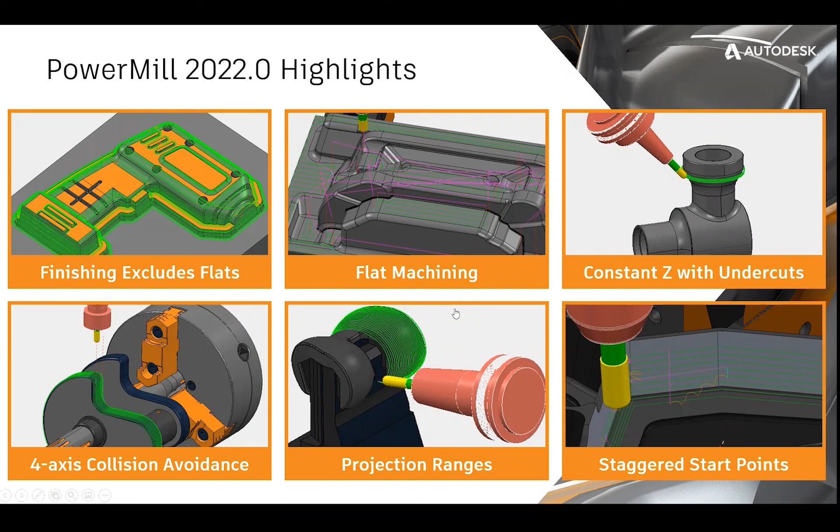And lastly, we're going to talk about staggered start points. This is one of my favorites. For those who weren't aware, you can actually do this manually, but now you have an option to do this automatically within the software. We're going to go into a deep dive here and talk about each one, then go into the software and show you exactly how to activate these features.

Okay, starting off with exclude flats. How does it work, what does it do? One of the biggest things when it comes to finishing toolpaths - if you're using some sort of steep and shallow, maybe a raster, or a 3D offset style finishing toolpath, the software is going to try to apply the toolpath wherever it can, granted that you don't have a boundary containing that toolpath.

So up to this point, if you take a look at the model and wanted to apply some sort of toolpath to it - in this case a steep and shallow toolpath - you would have to create a boundary in order to contain it to only focus on the actual core part, in this case the mold. So it takes a bit of a workaround, a bit of extra time, extra picks and clicks to get that boundary to work, and then you would apply the toolpath to the model itself.

Now inside of those three different types of finishing strategies, you have the option to exclude flats. Exclude flats excludes all of the flat machining areas, as you can see here. So fewer boundaries that you have to click or create, making for more efficient programming, and you can get your part out to your machine much faster. It's only going to be for these three toolpaths - I want to make sure we're clear on that.

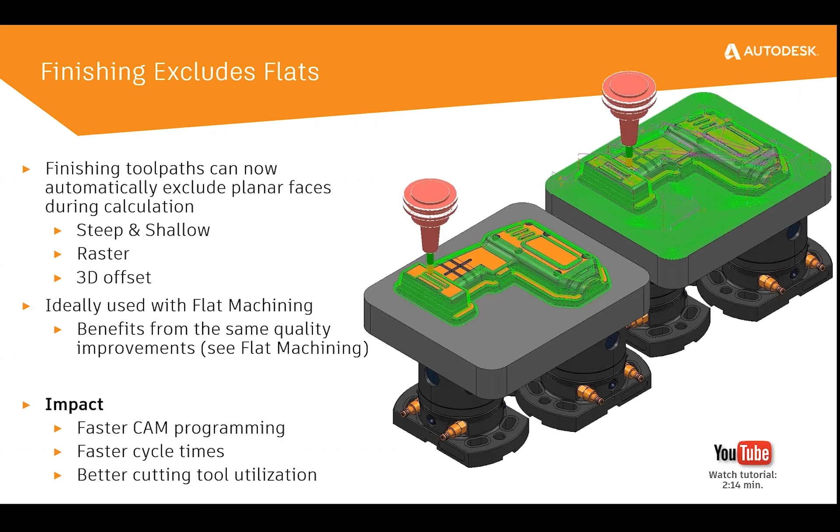Now, on the flip side of things, we also have an enhancement to the flat machining strategy. We're still sticking with the same theme of flat machining, or working with flats. One of the reasons for that is this is actually something Autodesk wanted to focus on a little bit more inside of this new release.

Again, just based on the feedback that they got from customers, and based on some of the forums that Autodesk has out there for PowerMill. So the flat machining toolpath has been around for many releases. I don't want you to think this is something new.

The latest update sees a considerable improvement in the quality of the boundary. If you don't know, there's actually a boundary that drives this toolpath. It has to understand where the flats are, and create a boundary on the back end of the software.

Up to this point, the boundary it was creating was causing issues with the way the toolpath was generating. It's a little hard to see, so I'll show that better during the live demonstration. But we have two toolpaths here superimposed - the green one is from 2022, the white one is from 2021.

The issue that was happening, and this is something I got a lot of calls on from customers, is that if you zoom in really close, it's kind of hard to tell, but it actually chamfers the toolpath a little bit, especially in internal corners.

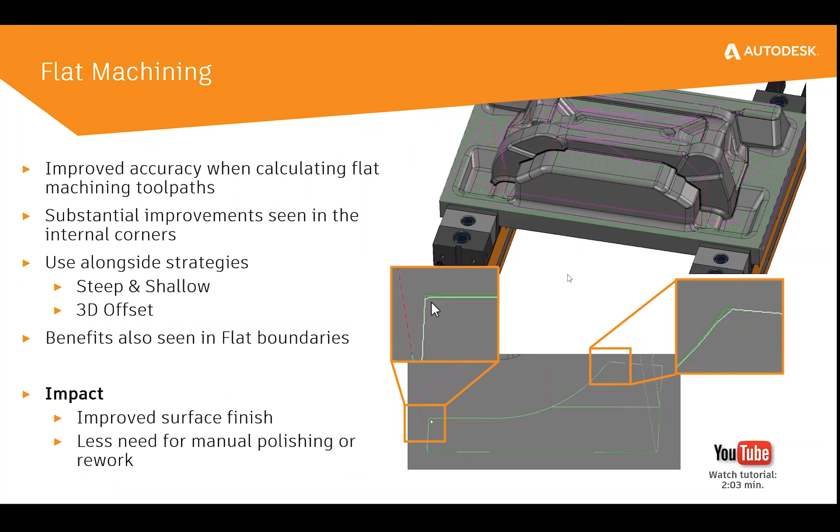All right, moving on to the next improvement - this involves the constant Z machine toolpath, specifically constant Z with undercuts. PowerMill has provided the ability to machine these undercuts with constant Z for a number of releases. This isn't anything new, but it really depends on the geometry being machined.

So if you were using, let's say, a lollipop cutter, you can actually focus this constant Z with undercut strategy with a 3-axis machine. You didn't need to use a 5-axis machine in order to machine some sort of geometry like this.

But if you wanted to, or if you had the capability to machine with a 5-axis machine, you can apply automatic collision avoidance. What does that do? It figures out where the collision is going to take place, and then it tilts the tool away from either the part model or the fixture, avoiding any sort of collision.

Now, in previous releases, the constant Z toolpath could fail depending on either the geometry, or if you combine both the constant Z and the undercut option. So it was failing - if you take a look here, it was causing some sort of fragmentation.

It wouldn't fail if you turned on the spiral option - you do have that option. And it would apply toolpath to the actual feature you wanted to machine, but this is what it would cause - a lot of fragmentation, a lot of noise around specific areas, and it just wouldn't give you a clean toolpath.

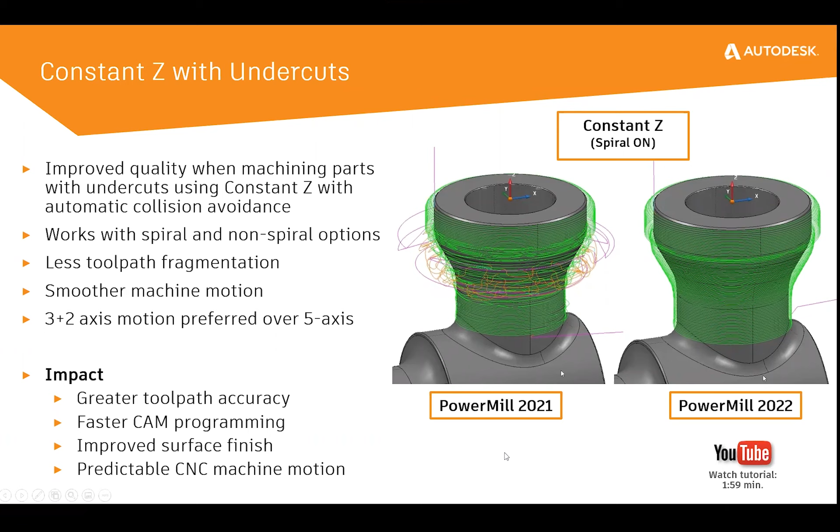All right, and then this is another one of my favorites - the 4-axis and rotary toolpaths. Up to this point, you didn't have the option for automatic collision avoidance. Automatic collision avoidance is an extremely useful feature that's embedded, but it was only capable, up to this point, for your 5-axis machines.

PowerMill now has the ability to actually apply this to your 4th-axis and rotary style toolpaths. It's doing the same exact thing - keeping the same exact tool, you can see that it collides here during this little feature. What takes place then is that it's going to cause the table to shift or move in a specific way in order to automatically avoid that specific area. So it becomes a true 4th-axis simultaneous toolpath because all axes are moving at the same time here. Really fascinating feature.

We're going to show this one in a live demonstration, so you guys will be able to see exactly what the machine motion looks like. But I'm really excited for this one because up to this point, you could only do that on 5-axis parts. Now you have the ability to lock the toolpath and apply that to your 4th-axis and rotary toolpaths.

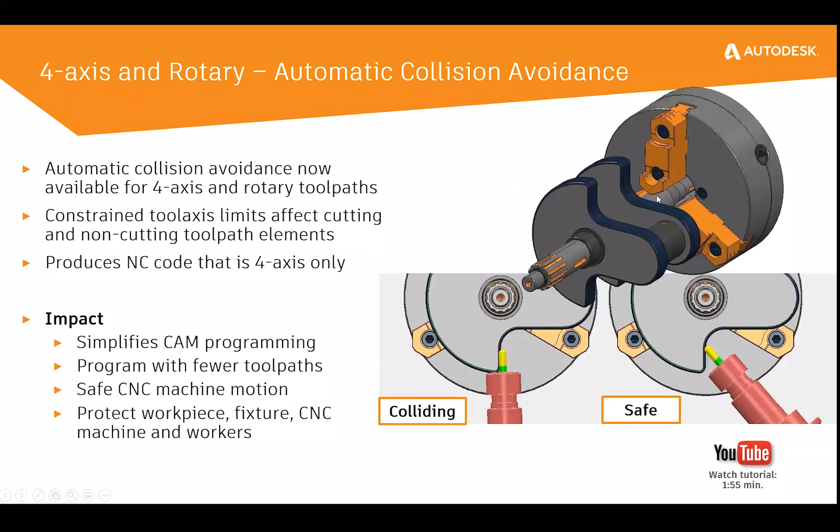So really specific toolpath. The way it works is that the user can create either some sort of reference surface, a curve out in space, or some sort of line out in space. And what you can do is translate that or project that geometry onto the model that you're trying to machine. So you can project a specific style of geometry - if you want the toolpath to follow that geometry, or follow a specific surface, you can do that and then project it onto the model you're going to machine.

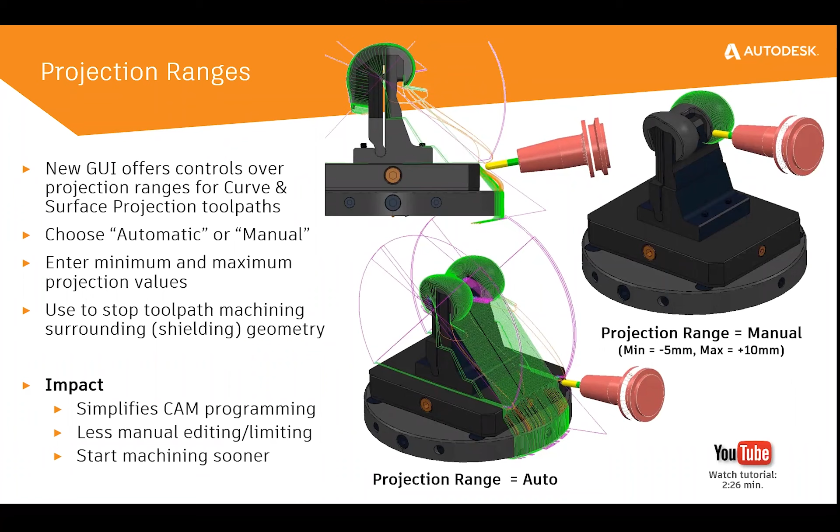Obviously, you can mitigate this by maybe having a bigger radius lead-in, or maybe having an arc in a specific way. There's ways around it. The point being is that no matter what, it's always going to be a vertical lead-in, right? So all the points are going to be vertical from one another in a closed loop.

So now with 2022, you have the option to automatically stagger these start points, right? So again, it's always going to have a forward motion for the machine, so it's not going to cause as much of a witness mark, right, as it would if you would have had just vertical start points.

Now, like I mentioned in the very beginning, you can do this manually, right? Especially if you guys are a little bit more on the advanced side of things, and have explored some additional functionality within PowerMill, you can actually change the lead-ins for these points. And I'll go ahead and cover that during the live demonstration as well, if you do need to do that manually. But again, point being, for this specific release, you can now do this automatically, right, for these toolpaths.

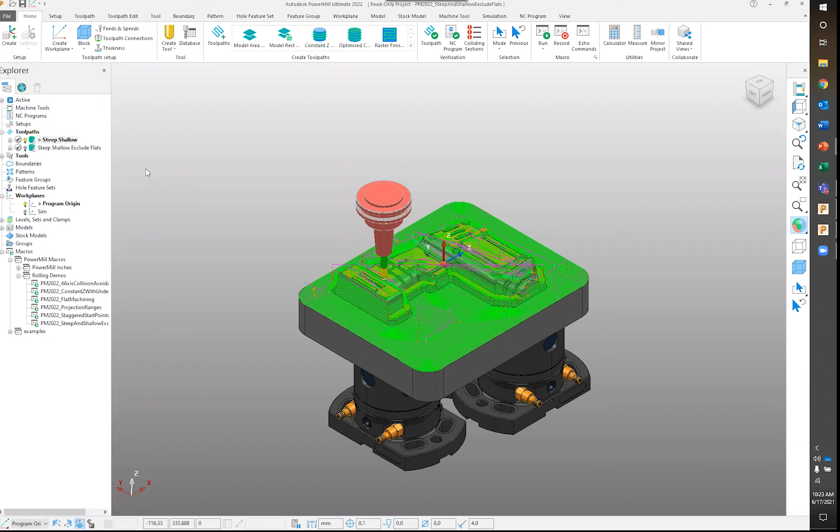Now, pretty straightforward. Most of these are honestly just commands that you can check on or off, right? So it's not something that you have to do a crazy amount of work to get to function or to get to work properly. So if you take a look at the steep and shallow toolpath, before you would have to create the boundaries, right?

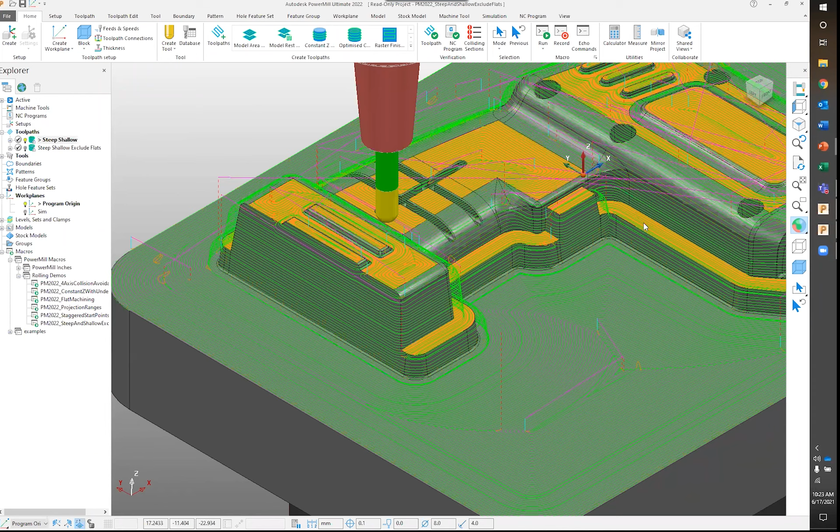Or maybe even a shallow angle boundary for some of these flats, and that's time consuming, right? Even if it's something like this. This outside boundary is pretty straightforward to do. But even some of the shallow angle boundaries would take some time, especially in a part like this. You have a lot of organic surfaces and a decent amount of flats here as well, so it would take a little bit of work to create the boundaries.

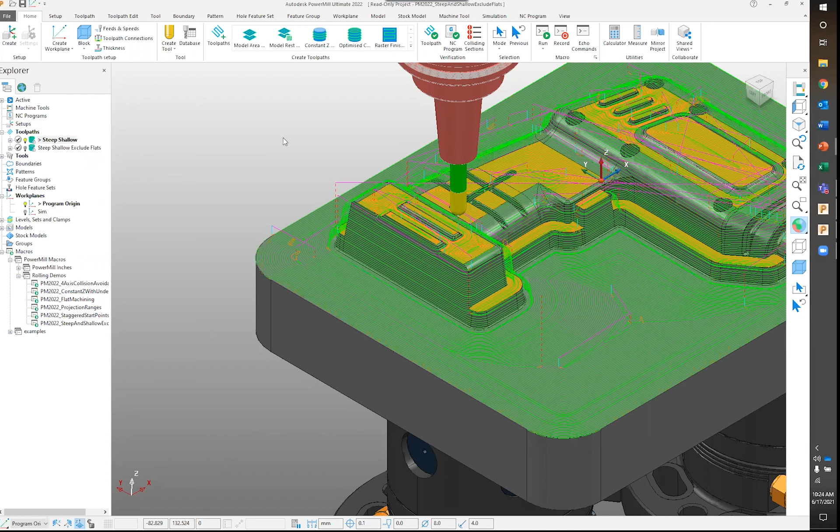So if you take a look at the steep and shallow toolpath, this one was created in a previous release of PowerMill, and it's doing exactly as you would expect. We applied the toolpath, we don't have any sort of boundaries applying to it, and it's just adding the toolpath wherever it can really fit in.

Now, if we take a look at the 2022 version of the steep and shallow toolpath, if you take a look at the limit tab, you now have the option to exclude flats. Whereas before, in previous releases, you didn't have this option.

You can include, you can get pretty accurate with the flat tolerance, I guess I should say. So if maybe there's an area that's getting machined and you don't want it to machine, you can increase the tolerance here if needed. So you do have a value here that you can play around with as well. But again, when you want to exclude the flats, just go into the limit tab, and that option is found here at the very bottom.

All right, so the next one, the counterpart to this, is going to be the flat machining strategy.

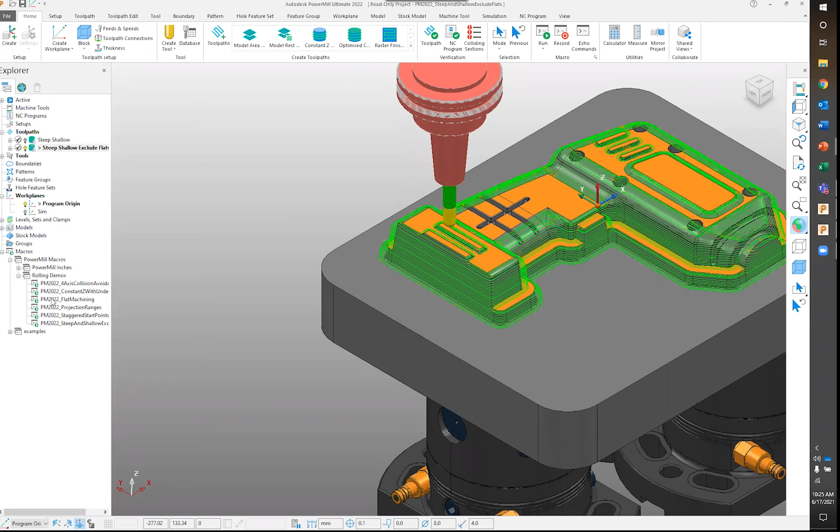Again, I have macros here that are controlling this, which, by the way, if you're brand new to PowerMill, macros are going to be somewhat advanced if you're not too familiar with the CAM software. But if not, I definitely recommend you guys take a look at macros.

So they're a huge time saver, they help you with redundant tasks. If you have something that's really repetitive, and you've thought to yourself, 'oh, I wish there was a way to really automate this or make this automatic' - chances are, if you're working in PowerMill, you can do it.

So not only do you have your commands up here at the top, but you can record the macro, you can modify macros, you can create macros from scratch, you can take a look at some of the examples. This is probably going to be a video for a different day, but I definitely recommend you guys take a look at the macros option here at the bottom.

Okay, so as I was saying, the flat finishing strategy - this is going to be your raster flat. If you take a look at flat finishing from previous years, this one is a little bit harder to see.

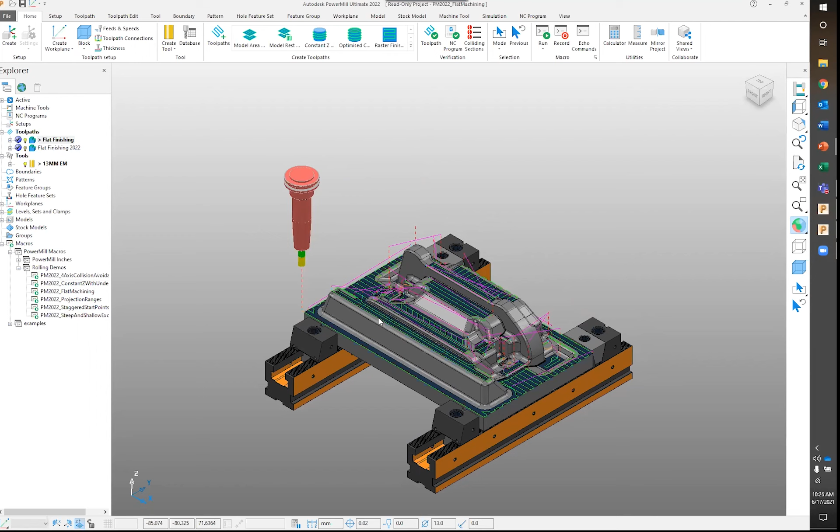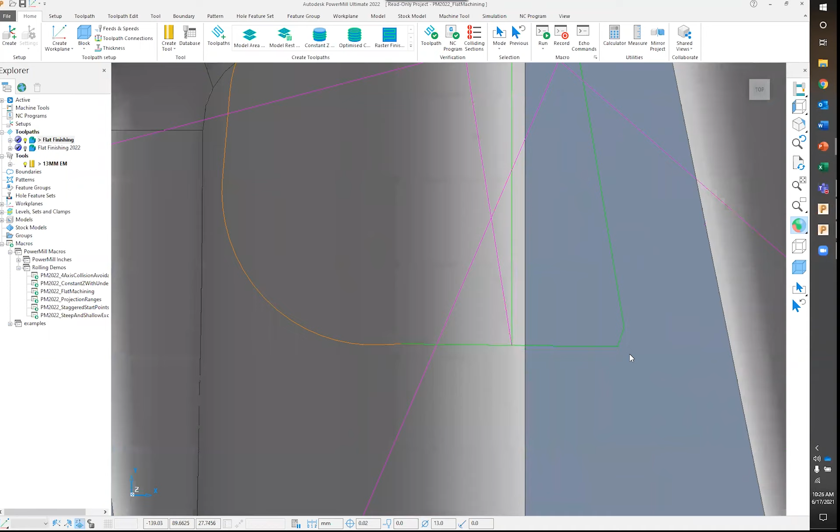And if you weren't really paying attention to the toolpath, this is something you probably wouldn't have really noticed. If you take a look at it, it's a little hard to see, but you can kind of tell how it chamfers the toolpath in some areas - some areas it does it more than others. This one, it didn't really do it. This one, it's doing it quite a bit. So this one is pretty noticeable, even though you have somewhat of a corner there.

So again, a lot of people are saying, well, that's driven off of the surface itself, right? In this case, it's not. It's an actual boundary that's driving the flat tool path here. If I take a look at another internal corner, you can kind of see the chamfering taking place.

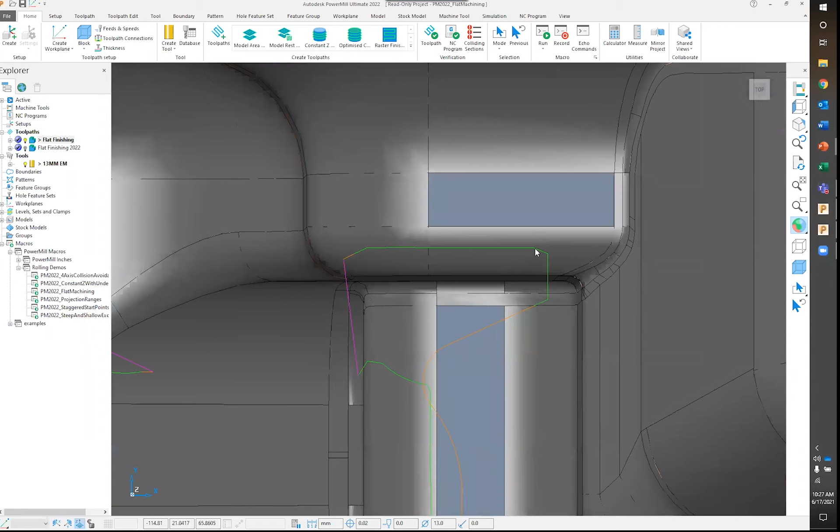So point being is that the boundary I was creating, it wasn't as accurate as it possibly could have been. If we take a look at this year's flat finishing strategy, and we turn on or superimpose the other one...

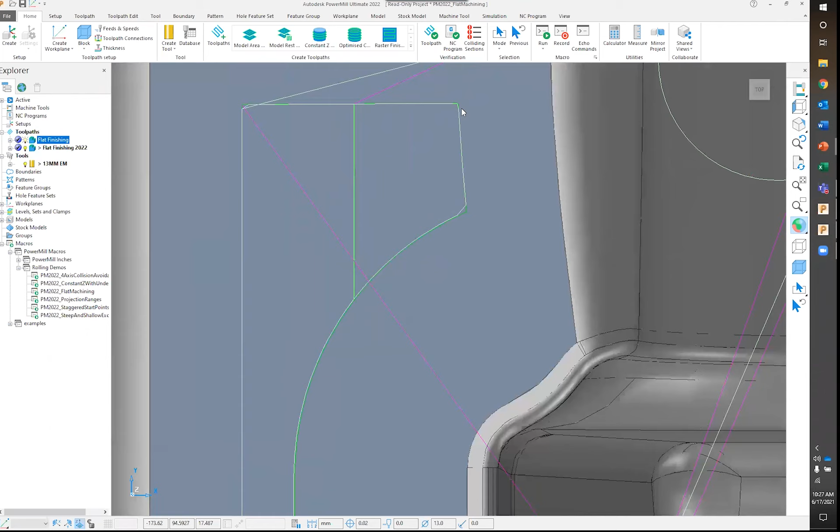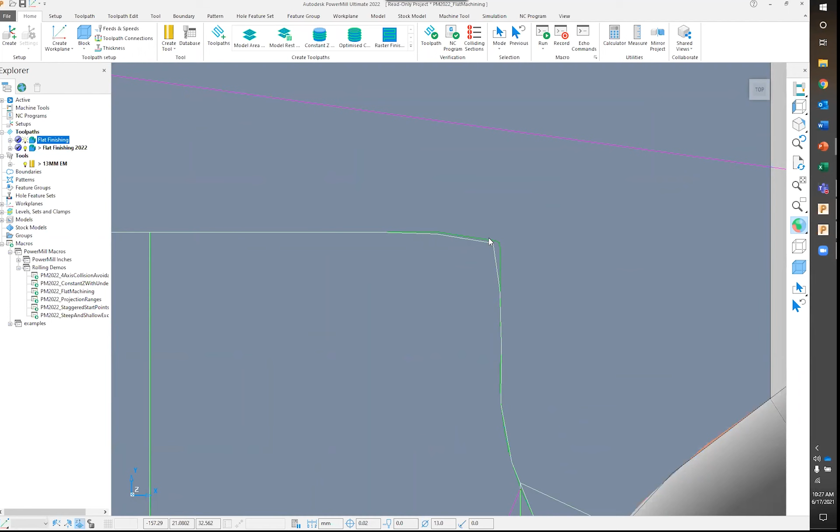Very minor differences, but these minor differences are what makes a huge difference, especially if you're in high critical parts, making molds, aerospace parts, or medical components. This is going to be a pretty big deal for a lot of people. You can see the difference already - very minute for a lot of people, but like I said, it makes a pretty big deal for a lot of customers.

So again, this isn't something that you enable, this isn't something that you check on. This automatically just got enhanced in the background. So if you guys were wondering how this is working, it just automatically got improved. Now, this isn't just for your raster flat option.

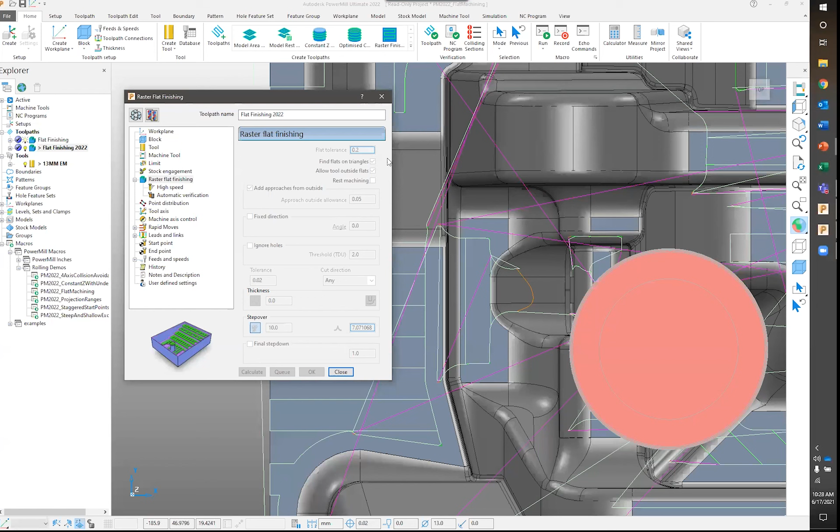Any one of your other flat machining strategies, they got improved too. Any sort of toolpath that drives off of flats or some sort of boundary like that, even when you create your flat boundaries, that also got improved as well. So it's not just this raster flat toolpath - it's all the flat toolpaths using some sort of boundary to machine the flats that got improved. Really neat. This is something I'd consider small, but very effective in the long run.

Okay, and then the third benefit here, I think, was the constant Z with undercuts. Now this is a pretty interesting one. So constant Z with undercuts - the constant Z toolpath is a really good toolpath. It gives you a nice toolpath when it's working properly.

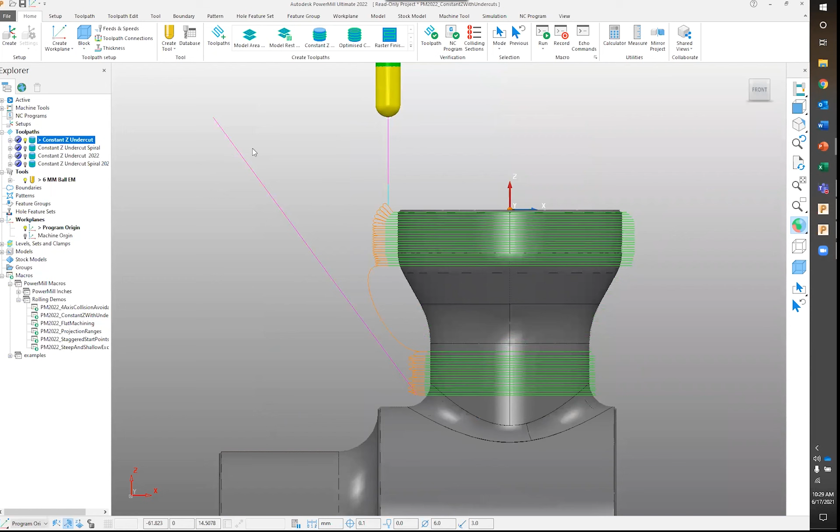So if I take a look at what you would experience with maybe a 2021 version - this is a constant Z toolpath with the undercut option turned on. And you're probably thinking to yourself, well, why did it miss the entire part here? So that's what it does. It has constant Z - you can even tell that it tilts the tool a little bit.

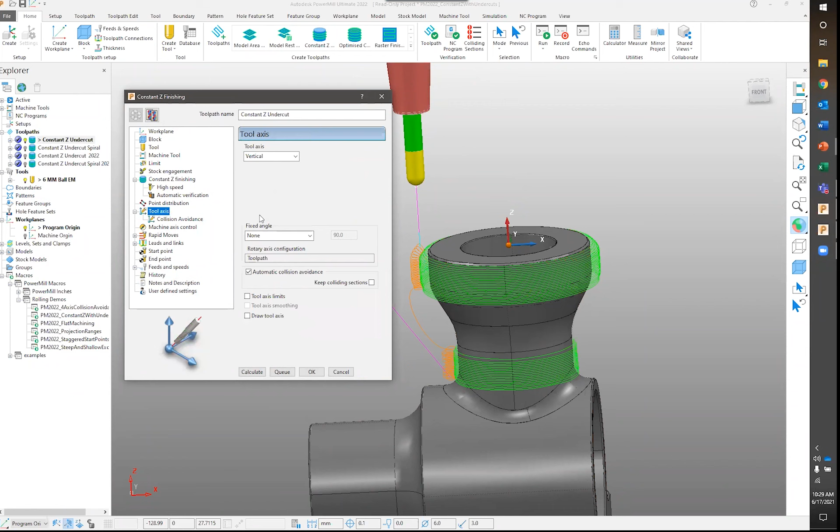So it does have automatic collision avoidance turned on as well. If I take a look at it just to double check - yeah, so it has automatic collision avoidance turned on. This is technically a 5-axis toolpath. Now, being that it's a 5-axis toolpath, and obviously we have the undercut option turned on, you would expect it to actually machine this portion as well.

So figure out how to tilt the angle a little bit and then machine this part. This is the issue that I was talking about earlier. So in PowerMill 2021, when you had the undercut option and were using this constant Z toolpath, sometimes you would experience an issue like this. And again, it was just because of the geometry that you selected, or maybe there was something going on with the geometry - I'm not too sure why it was missing this option.

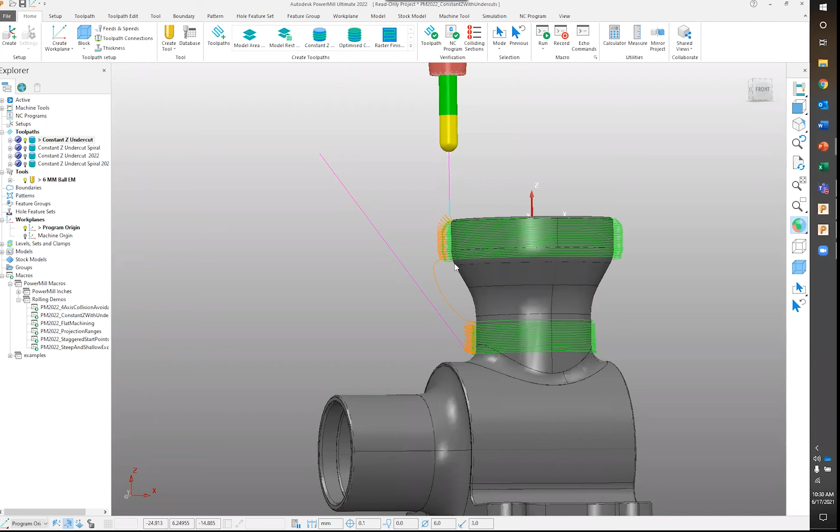Now, a way that customers were essentially going around this was by turning on the spiral option. So if we take a look at what it looks like in 2021, this is what you get - you get toolpath on the feature or the surface that was missing. But again, it's not the cleanest - it has a lot of noise, a lot of fragmentation going on here at the end, a lot of lead-ins and lead-outs that are definitely going to cause your machine to slow down a little bit. So not the most ideal toolpath scenario for this feature.

Now, the upgrade or enhancement that's been done in 2022 - if we take a look at it with the undercut, it's a little bit better. Now you actually get the entire surface machined that you wanted. But if you take a look at the simulation real quick, I'll simulate this from start - probably bring the speed down just a little bit.

You can still see that it has the lead-ins, right? So it's not a continuous toolpath at this point. It's still leading in a little bit. And again, it has to do with the automatic collision avoidance that we have turned on.

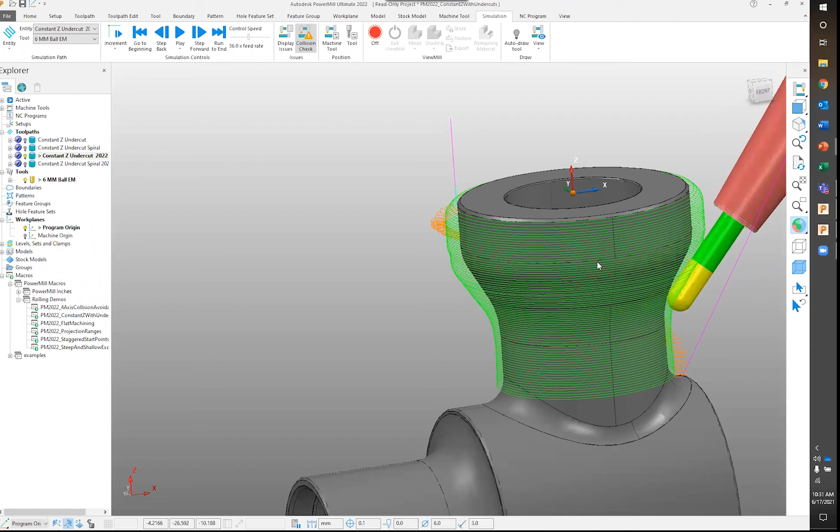Tilting the tool, so I'll pause it here just so you can see it, right? So it's still a really nice toolpath. The only issue that I would probably have with this is that it's leading in, and it's just kind of spiraling that lead in a little bit. So not a bad toolpath, still pretty good.

But if I take a look at this constant Z undercut with the spiral, this gives us exactly what we would expect, right? So it gives us a nice continuous spiral toolpath. It doesn't stop, it doesn't lead into the surface. It just gives us a nice clean toolpath all the way around.

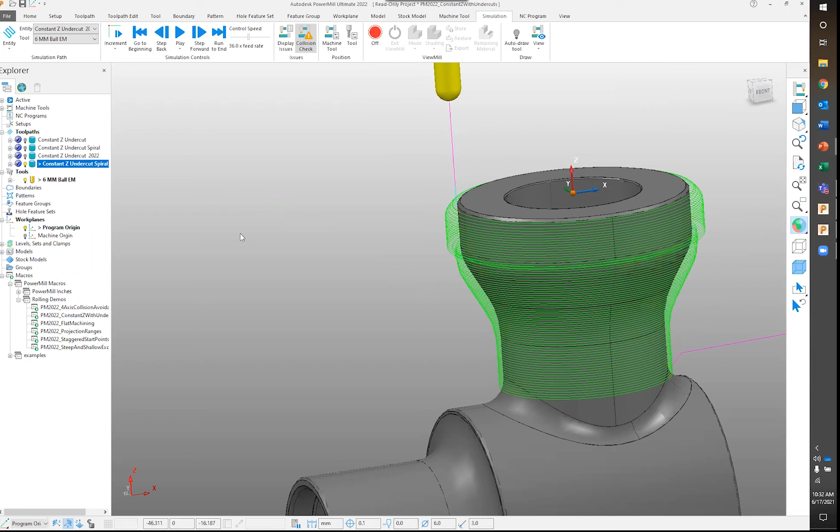So which options are the ones that I turned on? If I take a look at the settings, those two options are really just going to be within the constant Z finishing strategy. So you have the undercut option here, which you've always had, and then you have the spiral option turned on as well. So again, nothing else that you have to enable. There's nothing else within the tool axis or anything like that.

Normally you're going to find most of these options within the actual toolpath settings, the limit settings, or as you'll see here in a bit, you actually find some settings inside of the leads and links option. So again, constant Z finishing with undercuts has been improved, and it now allows for a better toolpath strategy for some of these more unique geometries.

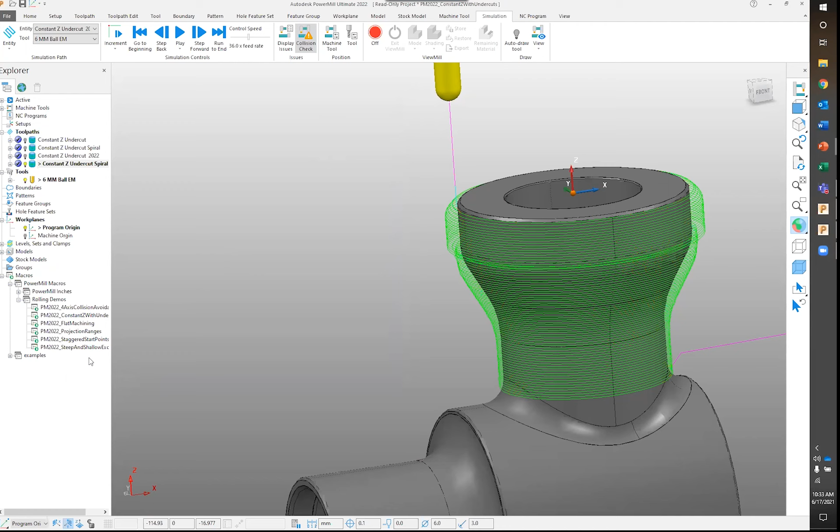All right, and then probably my favorite one here is going to be the fourth axis collision avoidance. Like I mentioned before, collision avoidance, nothing new, right? Automatic collision avoidance has been around for quite some releases now. The only difference is that it hasn't been added to your fourth axis strategies before.

So if we take a look at this rotary finish, which is your traditional toolpath, what you would expect up to this release. If we simulate this one, bring the speed down just a little bit, right? So it's going around, traditional fourth axis toolpath, and then it would collide here with the actual part itself.

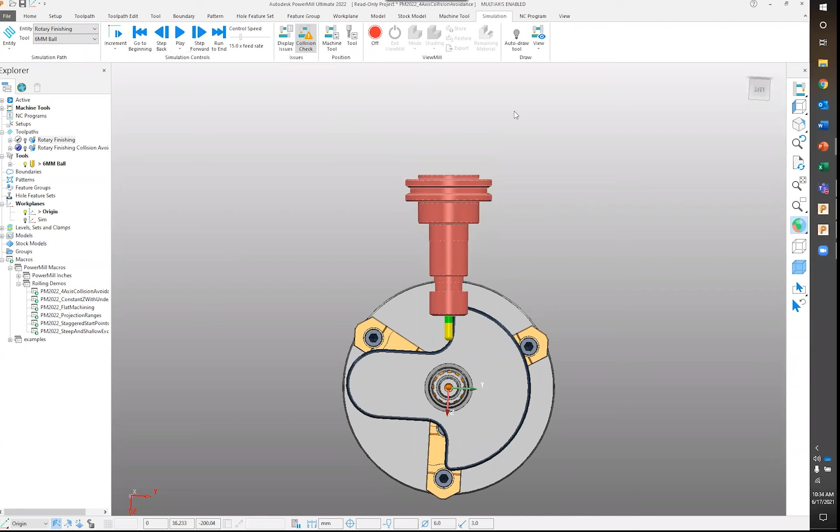Now, if you're doing something with dynamic machining, what you can do is you can actually edit the tool and then do some sort of rotation around the actual area that it's colliding in. So you would rotate the tool slightly. Obviously, that would cause the machine to move, being that this is just a strict fourth axis toolpath. You would have to come in here and actually change the toolpath itself, change a specific area, and then call it a day.

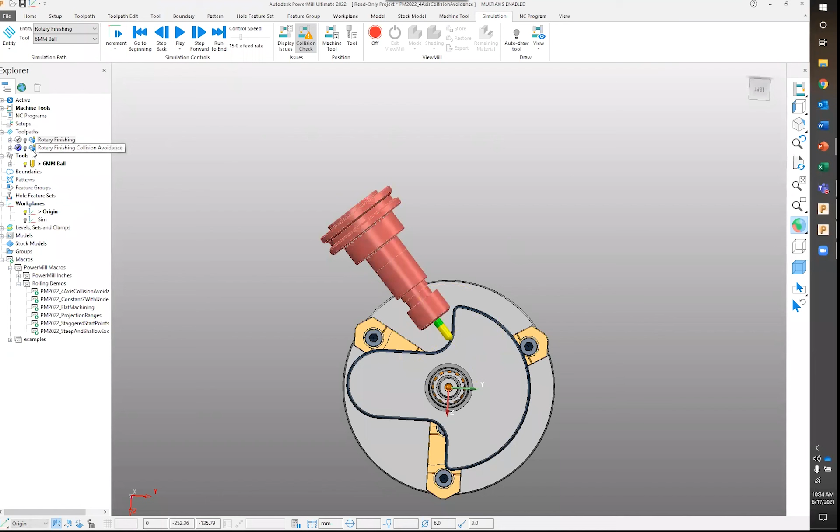But again, with this, what you can do now is run automatic collision avoidance, and I can take a look at the setting where it's at. Same exact location, right? So now inside of the rotary finish strategy, you have this tool axis addition.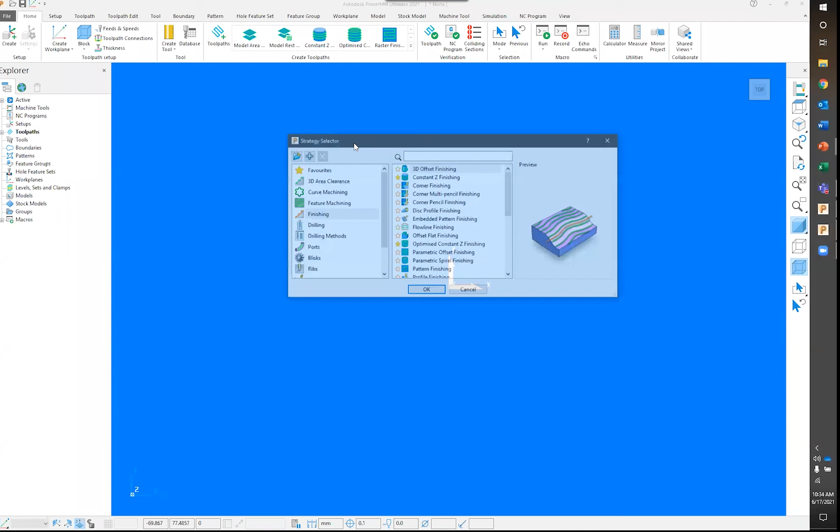Reason why I have 2021 turned on is because if you take a look at that rotary finish strategy as well, you don't have that tool axis tab that controls the automatic collision avoidance. So just wanted to make sure you guys were aware. So if you're still in 2021 and using fourth axis, or have a strict fourth axis only machine, it might benefit you to upgrade to 2022, or at least update to the latest revision of the software.

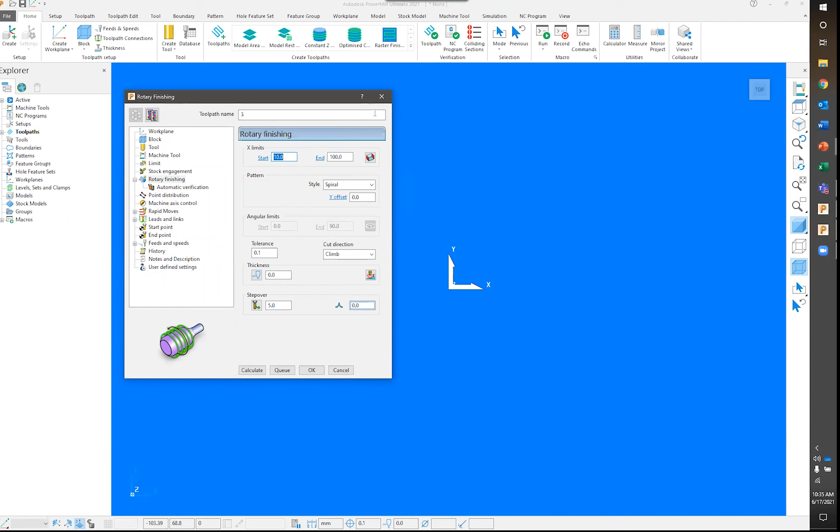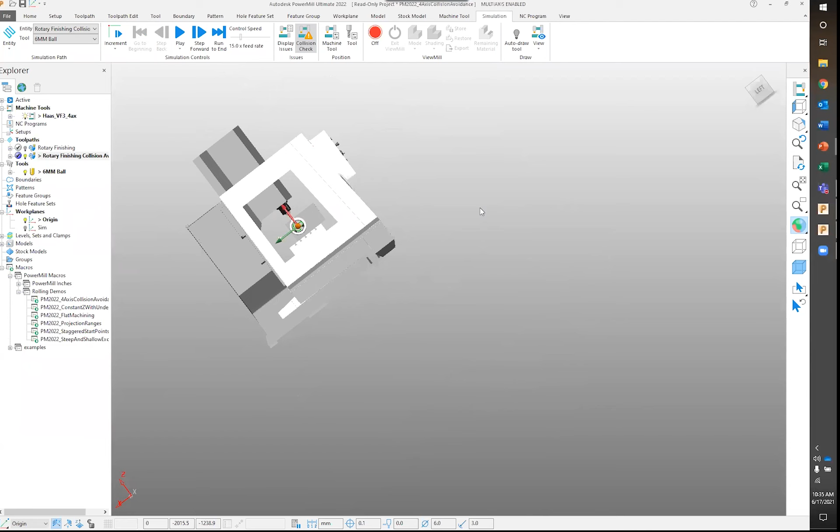So again, back in here, if you go to the tool axis tab, you now have the option for automatic collision avoidance. And if we take a look at what it looks like with the machine turned on, I'll go ahead and run this simulation from start. Let me actually turn the opacity of this down just a little bit.

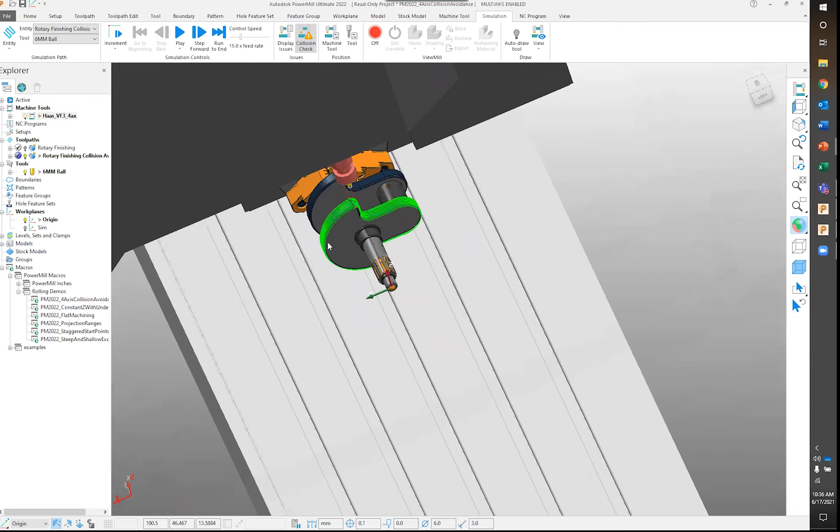Right, so it moves the actual machine at the same time. Automatic collision avoidance is automatically doing this. You can set a smoothing tolerance for this too.

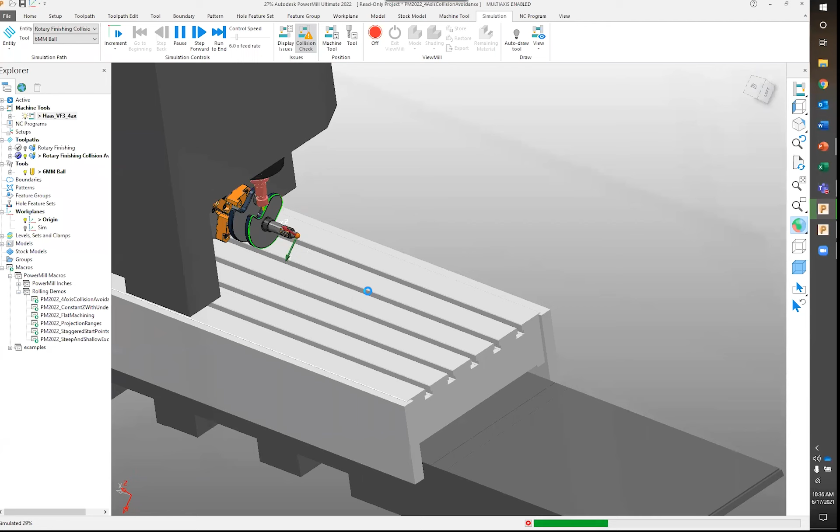So if you wanted to set a specific smoothing tolerance or a smoothing distance, you can specify that in the automatic collision avoidance option as well. But again, really excited for this one.

Like I said, we have a few customers that are just doing specific fourth axis toolpaths, and this is something that they were asking for quite some time. So now instead of stitching a few toolpaths together, or maybe thinking of a creative way to get this to work, they can just enable the automatic collision avoidance and have the software take care of this automatically for them. Really neat feature that's been added to 2022.

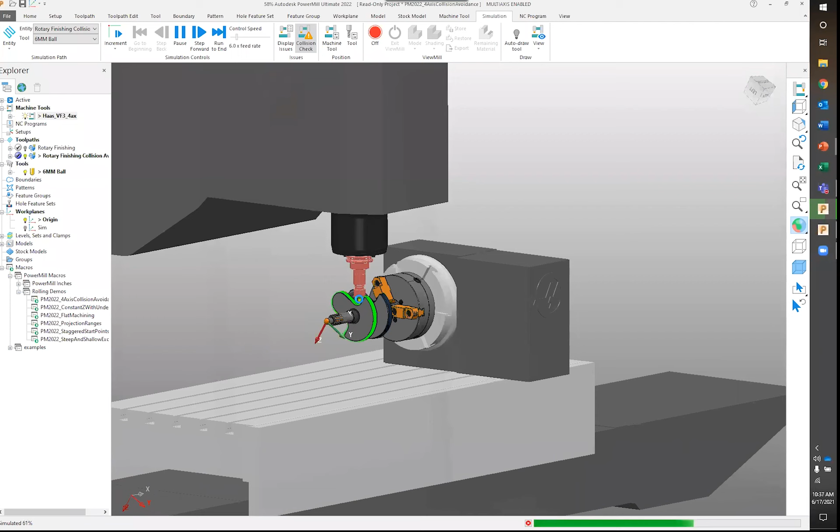All right, so let's jump on to the next one. Let's go on to projection ranges. Again, if it feels like I'm going pretty fast, it's because it's a straightforward option to enable. There's not much you have to do in here to get some of these enhancements to work.

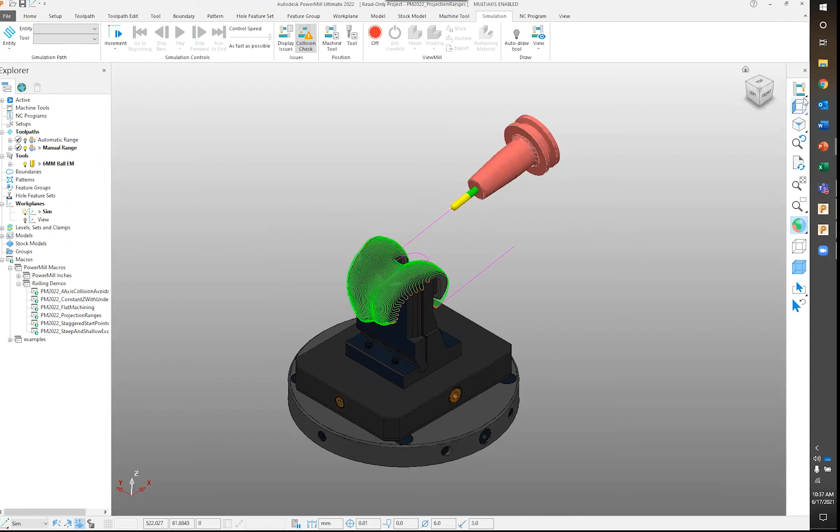All right, if we take a look at this part, this one makes the most sense if we turn on the actual surface that's driving this. So if I take a look at the projection surface that gets created here, a little hard to see. Let me turn this off. But there it is - that's the actual surface that gets created, whether in Fusion 360 or PowerShape.

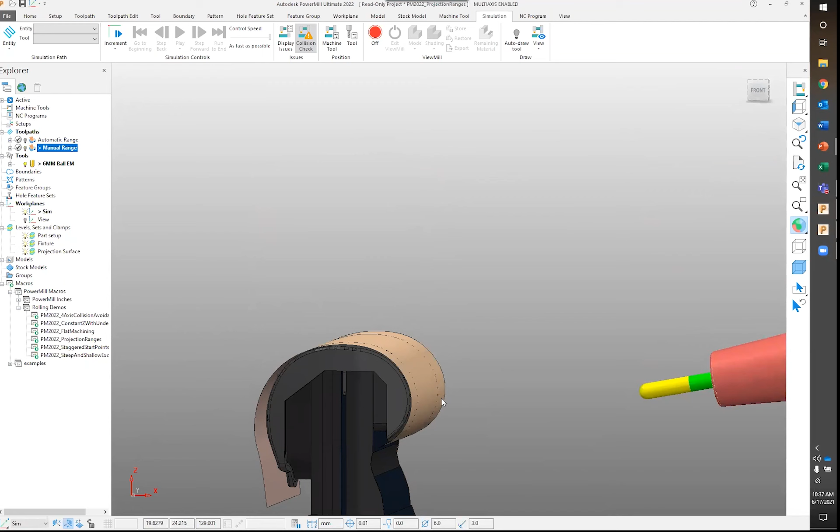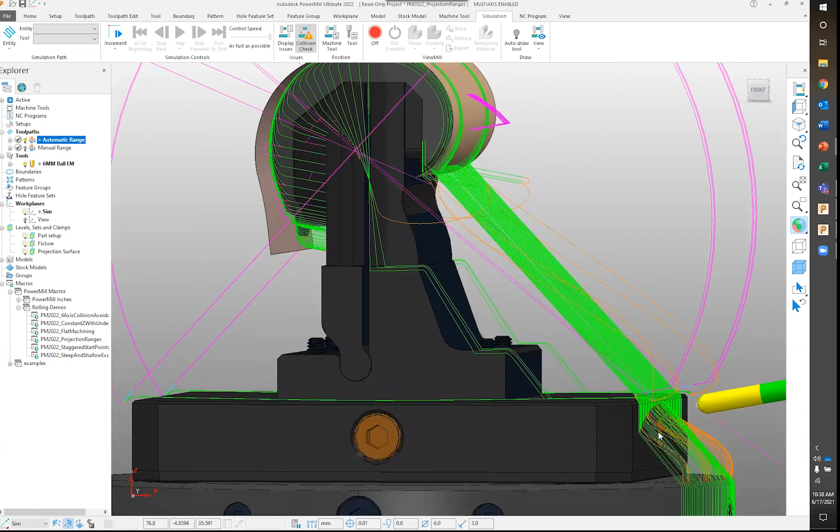But that's the surface that was created in order to generate the projection. Now if you take a look at the automatic range, the previous year, 2021 and before, this is what it was doing. So you can see exactly what's happening - that surface extends here to the outer part, or the lower part of the part, and so it's extending out into the actual machine model and the actual machine fixture. So again, not ideal - this is something we definitely don't want. This isn't what we were expecting.

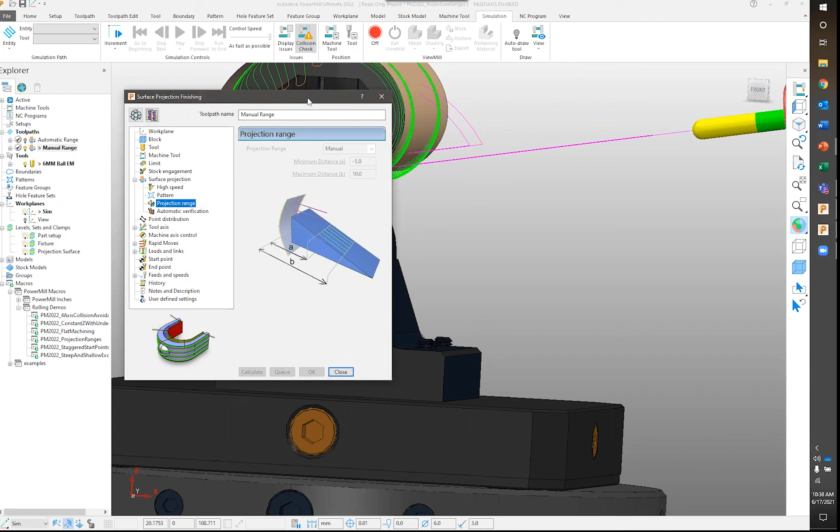If we take a look at the manual range one, and go to the settings here, you'll see that option is actually going to be found. If you take a look at the limit tab, actually projection range tab, there's a limit you can now give it. Now this image, honestly, to me, when I looked at it, was a little confusing. If you look at it here, it kind of makes sense - so it's projection, you're giving it a lower limit and then a max limit. But if you look at a part like this, how does this kind of represent that?

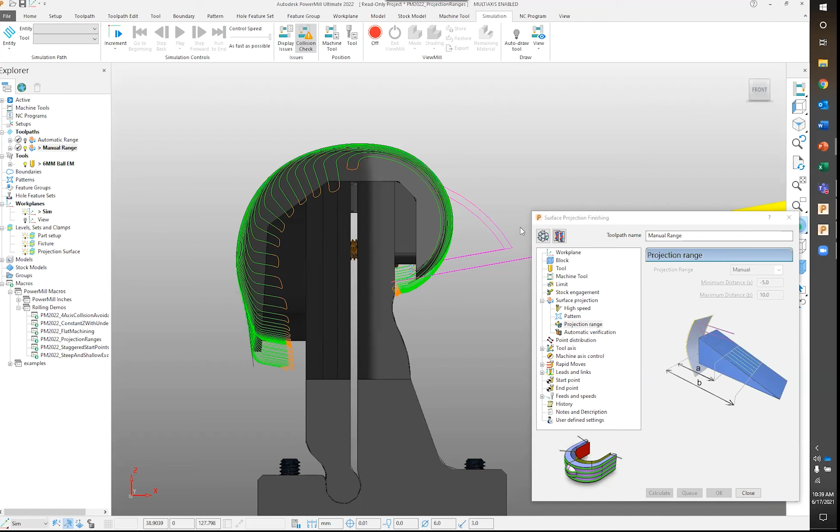So the best way that I feel like I can think about it, and kind of let you guys also see it, is by the thickness of it. So you're specifying essentially - if you can kind of think of an offset that gets thickened - you have an offset here of +10, offset here of -5. That's more or less how you're controlling where the toolpath is going to go. So obviously it's going to try to machine this part, but depending on this distance that you give it, that offset distance is what controls how far the toolpath is going to go into the part itself.

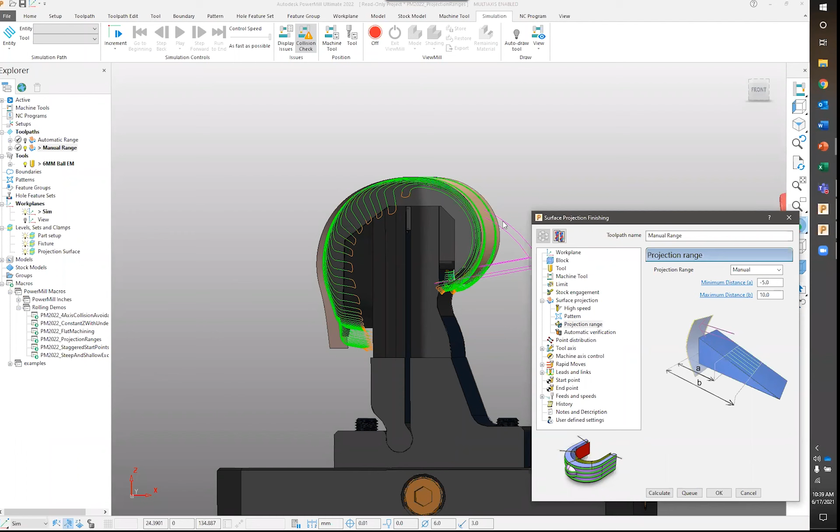So again, it's going to take a little bit of testing here, but once you get the hang of what exactly the software is doing, you'll be able to see this distance and how it plays a factor inside of this toolpath. So again, the way I can think of it is an offset - that's how I envision it in my head. It might be different for some of you guys, but the way I envision it is you have an offset, so you're offsetting 10 millimeters, offsetting -5, and anything in between, it's going to add toolpath to that specific region. So the surface projection toolpath is going to have a projection range option with both a minimum and a maximum. Instead of automatic, you now have the manual range there.

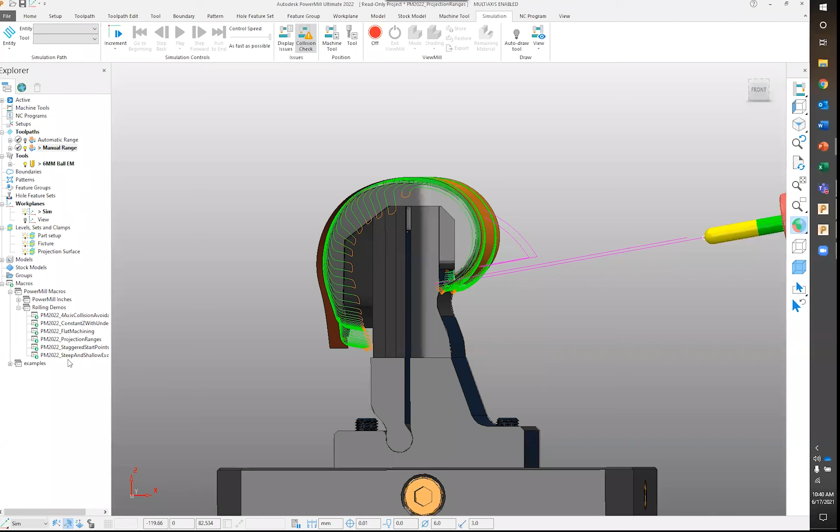All right, and then the last one here is going to be the staggered start points. So let's go ahead and run that part real quick.

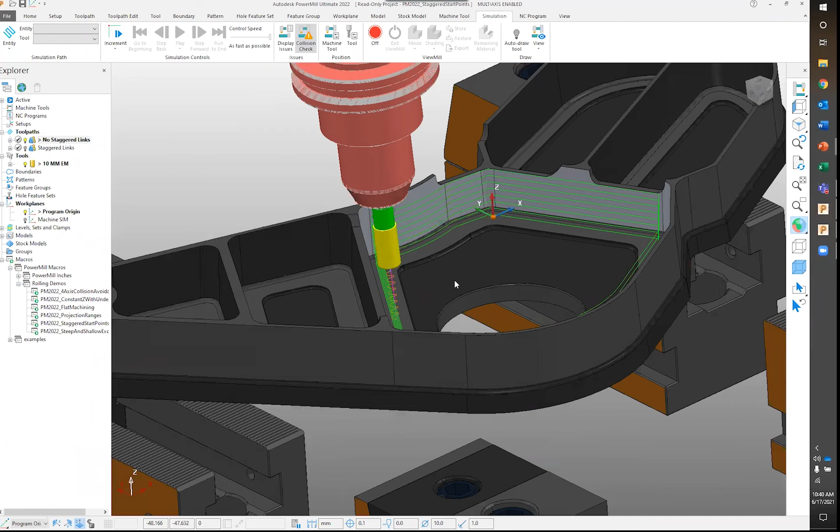So these lead-ins are always going to be vertical. If we take a look at the staggered links option, it's going to stagger them across the entire toolpath, or the individual step downs that you see here. Again, if you take a look at the settings or where this was activated, this is going to take care of inside of the lead-ins.

So leads and links, you now have the option to stagger the start points. Go ahead and edit this. So again, you click on leads and links, you now have the option to stagger start points. That's the only option you have to enable in order to get this to work.

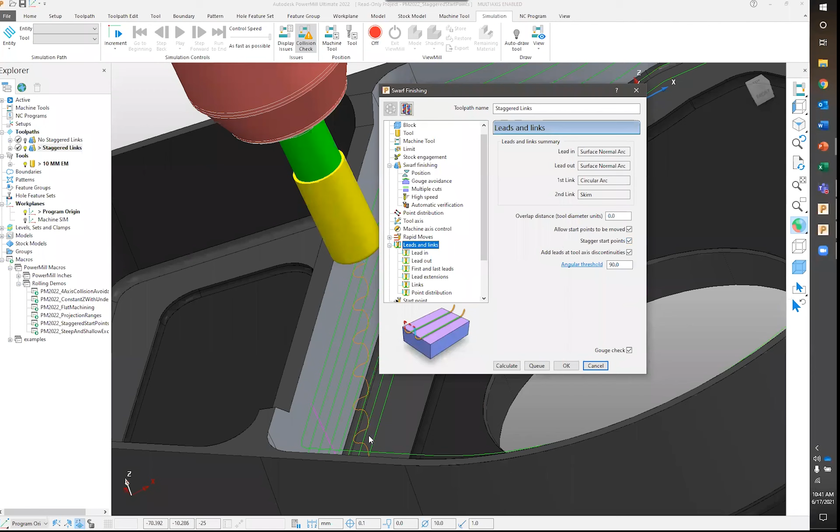Now, like I mentioned earlier, let me see if I can rotate this without spazzing out here. There we go. Okay, so I'll go ahead and turn on this no staggered links. Like I said before, you actually can edit this manually.

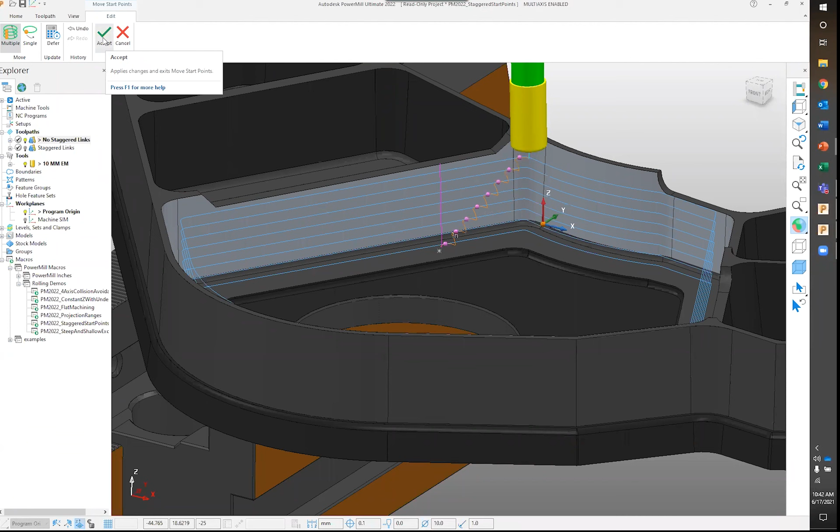So if you wanted to move the start points, you have the option under Toolpath Edit. Click on Move Start Points. You can either do a single start point or you can do multiple. So if you want to do multiple, let's say you wanted to start maybe on this internal fillet, this internal corner, you draw your line, and then accept it, and then it's actually going to move the start points for us.

So this is how you have a little bit more control. Like I said, I don't think right off the top of my head that there's a way to control the points automatically. If you wanted to control the distance from one another, or in this case, control based off an angle, I don't think you can do that. So if you want a little bit more control, you might have to give this Move Start Points a try, which is obviously the more manual approach.

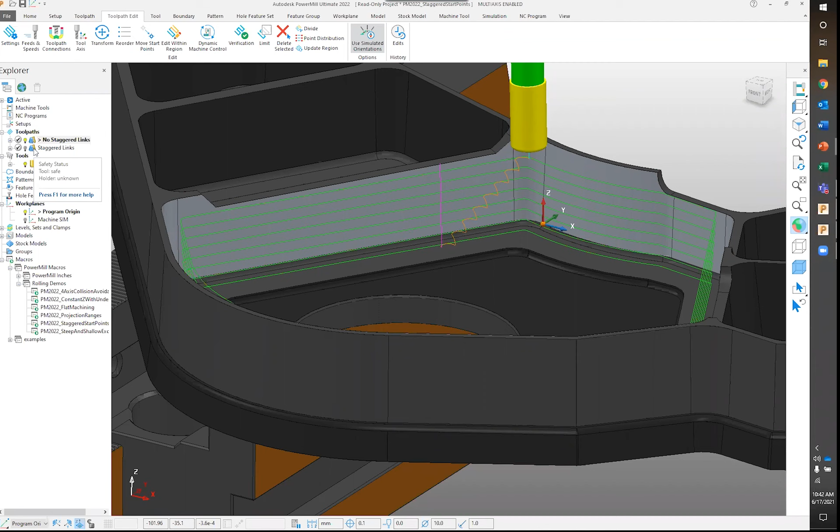But if you're okay with just staggering, if that's all you're looking for, then the automatic stagger start points in the leads and links option is going to be the way to go. And so that's the last one. Really straight to the point enhancements, but I think these small enhancements go a long way in terms of both surface finish and programming efficiency. I think this is going to be a pretty big deal for a lot of customers out there currently using PowerMill.

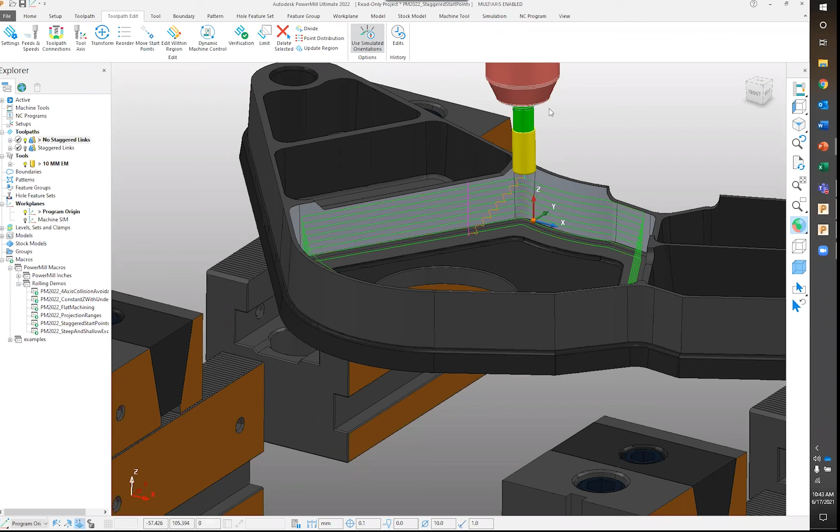So let's go back to the presentation real quick. Again, just a quick summary here of what we covered.

So finishing toolpaths, you now have the option to exclude flats. Again, for the finishing toolpaths, the exclude flats option, you're only going to see that in the raster toolpath, the 3D offset, and the steep and shallow toolpath. So those are the only three finishing strategies that you're going to see the exclude flats option on. We talked about the more accurate flat machining, how the algorithm or the boundary that gets created for the flat machining got updated just a bit.

Constant Z machining with undercuts also got an enhancement. You get now a much cleaner toolpath, a toolpath that actually does what we expect it to do in the first place. Projection ranges for curve and surface projection toolpaths, you now have an option in there to control the projection distance manually. And then we talked about the fourth axis and rotary collision avoidance, so you now have automatic collision avoidance for your fourth axis and rotary style toolpaths. And then staggered start points to give you a greater surface finish.

There's actually a couple more updates that I didn't talk about. For instance, probably one of my most favorite ones is going to be this incremental project saving. Up to this point, if you saved the project, opened it maybe a week or two weeks later, and just made a small change, it would save the entire project. There was no way for you to decide, okay, I just added this difference, I'm only going to save this part. Nope, it saved the entire thing. So that can be time consuming.

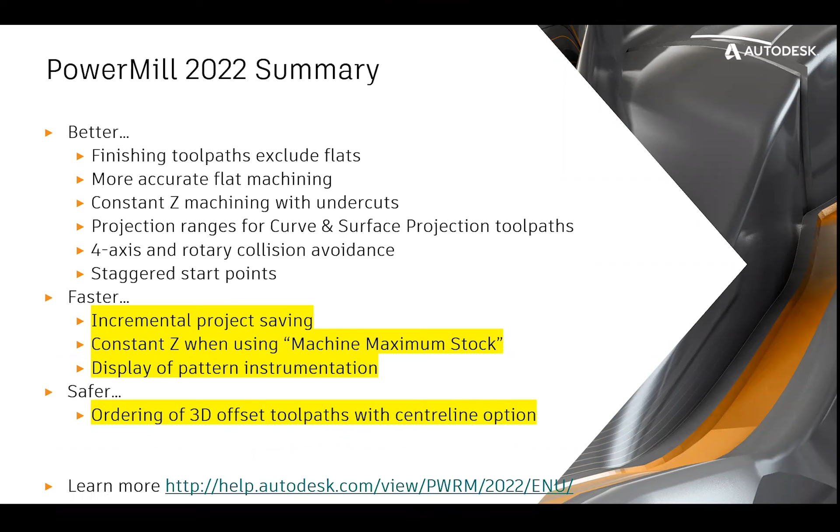If you guys want to download this, whether you're new users or existing users, you can go to your desktop app if you have that - it should have the latest version of PowerMill. If not, if you don't have the Autodesk desktop app, you can go to manage.autodesk.com and download it from there. And lastly, if you need help with installation or activation of your software, go ahead and reach out to us. Don't hesitate - Autodesk can help you too, but we can also help you out with the installation.